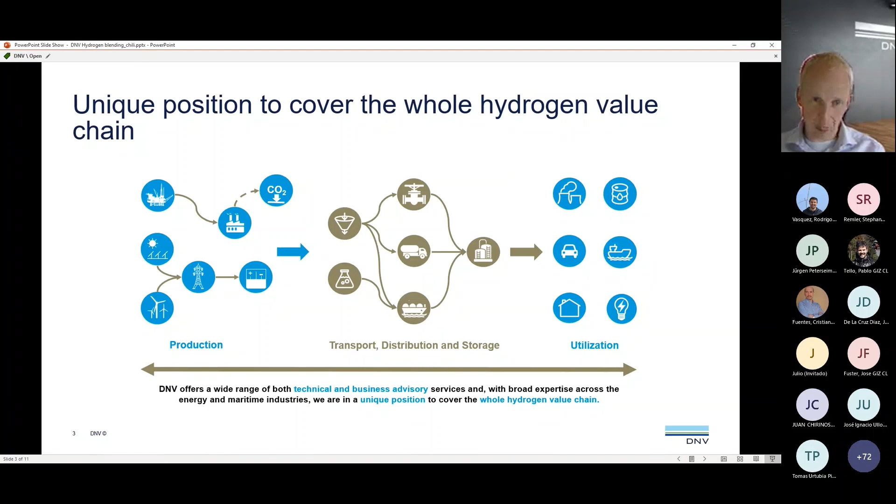So that's the overall view. And when zooming in a little bit more on hydrogen and the blending of hydrogen, I think one of the major projects that was executed in Europe some time ago already, where we had a role as DNV, was the NaturalHy project. In the NaturalHy project, a lot of R&D work has been done on the topics you need to cover if you want to reuse the existing natural gas infrastructure for transportation, but also the use of blends of hydrogen with natural gas.

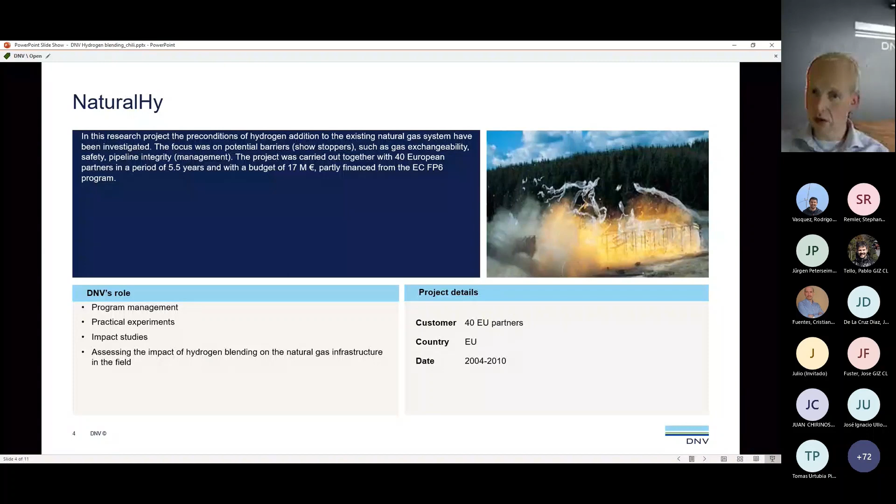It was a large project with over 40 European partners over a period of more than 5 years, funded by the European Commission. Besides the project management, we also did a lot of experiments, so it was really an R&D type of project. From that, we got a number of learnings, and it's good to mention some of them. For example, if you consider blending hydrogen into the natural gas networks, you have to deal with a number of aspects.

Looking at pipeline risk, the risk is always the chance that something goes wrong times the consequences. There we see that mainly on the consequence side, the effects of adding hydrogen are a little bit different from natural gas, and I will show you some examples of that in a minute. The last part is that in such an infrastructure system, all the gas going through the transmission system and the connected distribution system will end up in the end user appliances. There, blending hydrogen has the largest impact, I would say, and I will spend a few words on that in the next slide.

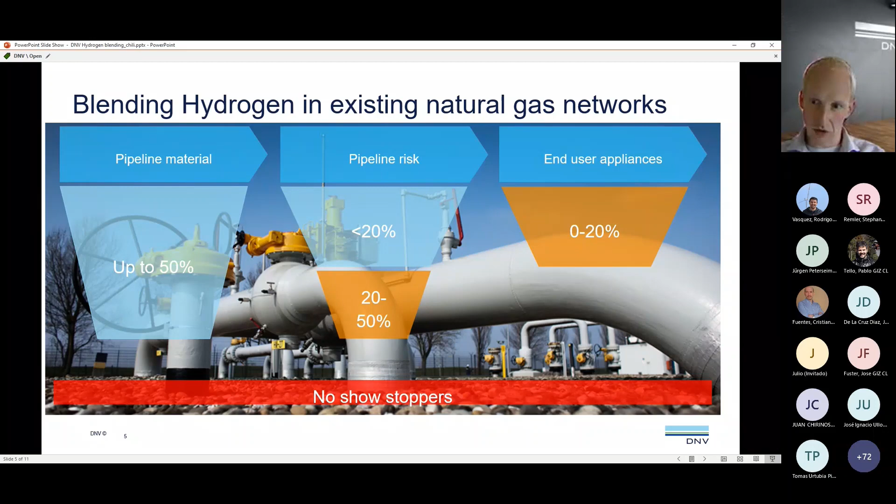Overall, you can see here what percentages are mentioned in the NaturalHy project for how much hydrogen you can add. One of the main lessons from the NaturalHy project, which we also see in ongoing projects considering hydrogen blending, is that there are no real showstoppers for introducing hydrogen into natural gas infrastructure systems. To focus on these three topics, I made a number of slides. One of them looks at the materials: what happens if hydrogen comes in contact with the steel of which the pipeline is made?

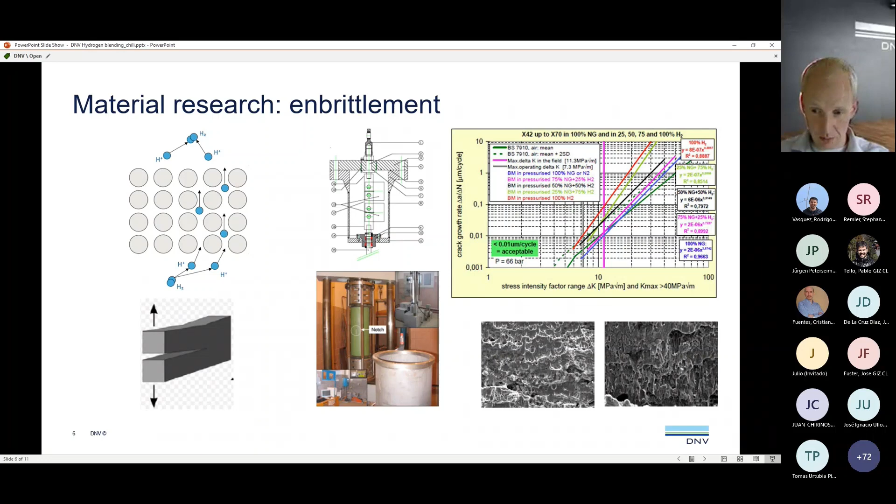So basically, the conclusion of this work was that in principle, you can use the steel pipelines that are used in the transmission system for blends of hydrogen up to even 100%. And that's also one of the main conclusions which, for example, now in the Netherlands is used by Gasunie, our TSO, to develop their hydrogen backbone, which is supposed to transport pure hydrogen through existing pipeline systems. So that's on the material side.

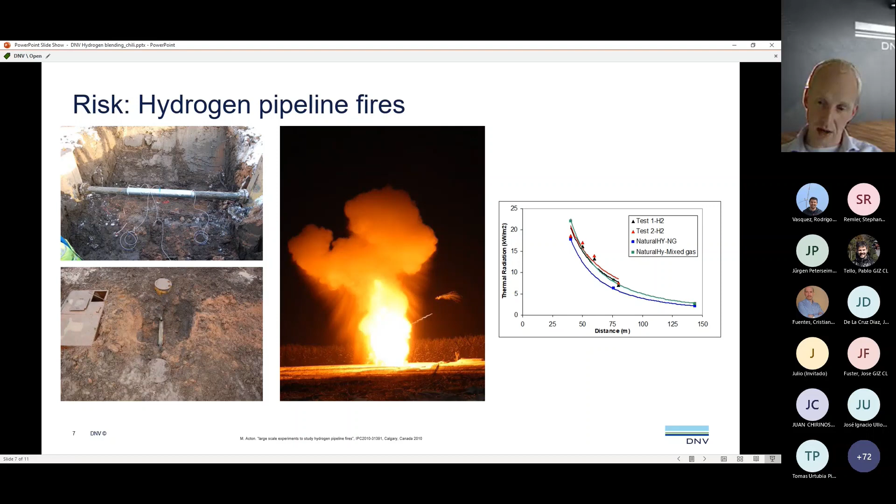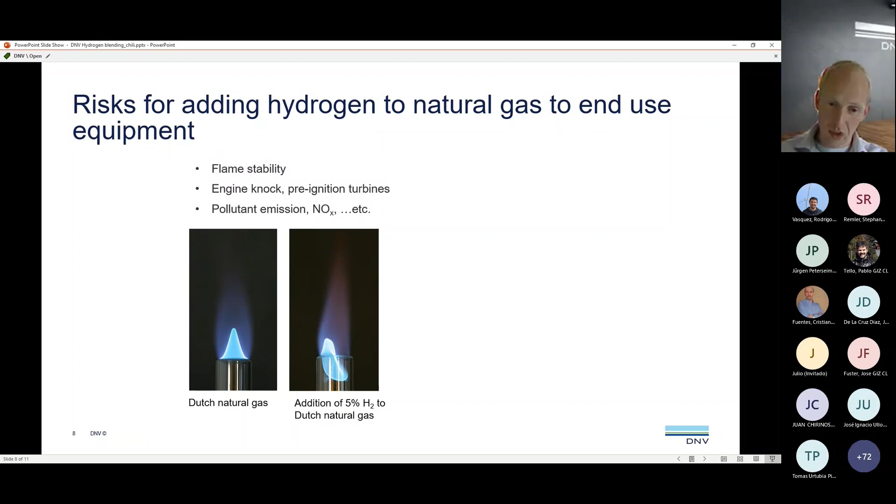So the second effect is that when the flame comes in contact with the burner deck, it could overheat, so higher temperatures, and it could destroy your burner. And the third effect is that the temperature of the flame is also higher, and because of that there are more NOx emissions. So there are three effects when adding hydrogen for combustion systems, and of course all kinds of combustion systems react a little bit differently, but basically these are the main effects.

And the same happens if you add hydrogen in an engine, where we have the combustion in a chamber, and then an effect called knocking of the engine could take place, which would destroy the piston of your engines. So as mentioned, the burning velocities are different when adding hydrogen to natural gas, and because of that, also the use of existing equipment for end use could be very sensitive to adding hydrogen to your network.

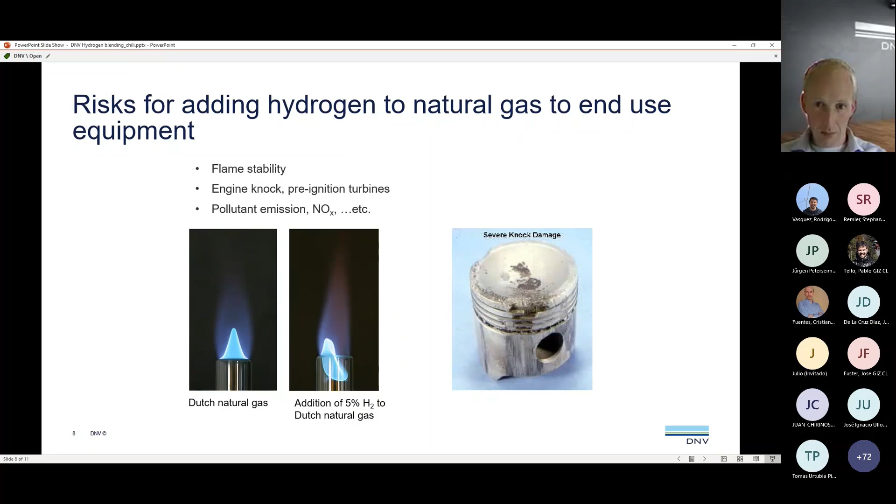And what we see is that indeed the temperatures of the flame are higher, and because of that also the NOx emissions are higher. But there are all kinds of mitigating strategies for lowering the temperature of the flame, which also would help to lower this NOx. The main conclusion here is that there are all kinds of innovative ways of solving the problems that we have with end user equipment, so that you can still use all kinds of blends of hydrogen. But the main thing, if you add hydrogen to an existing system, is to have a look at what the existing end user appliances are and how they are dealing with this blend of hydrogen.

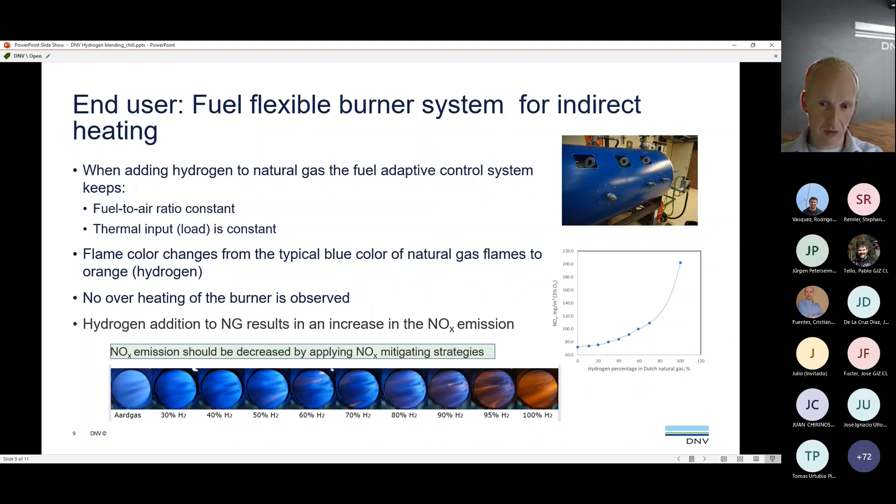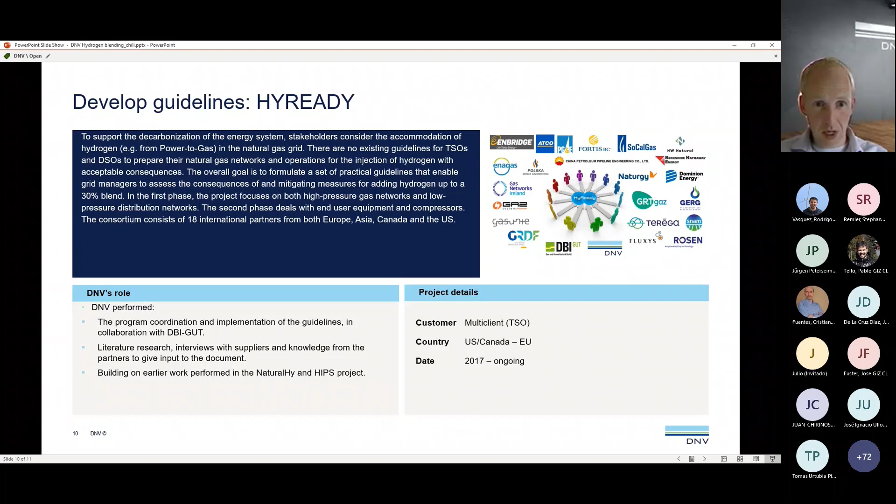And what we do there is make the guidelines not only for the transmission and distribution system, but also for the end user equipment. We have a look at the compressor systems, and nowadays we are working on the storage systems and the underground storage of hydrogen in salt caverns, for example. So this is an ongoing initiative which is still open for new partners. And with that, I would like to end my presentation, and I hope that I gave you a short overview of the work that we've been doing on hydrogen and blends.

Okay. I guess we will have the questions after this. Yeah. Thank you, Albert. As I said, the question and answer will be at the end, with the conversation panel. Yeah, we have some questions, but we'll take the questions at the end. Please, Jürgen, will you launch your presentation? The floor is yours. Just 1 second. Let me get the presentation up and running. Okay. Here we are. Share. There you go. It's here. Perfect. So let me know, can you see my slides? Oh, my slide. It's only one.

Yes. Thanks everybody. Thanks for organizing this event. And I think it's quite complementary to what my DNV colleague just said, with more examples and how we view the world, basically the market, after some technical specifications. Yes, Jürgen Petersheim, I'm with PwC in the Sustainability Services section of the company.

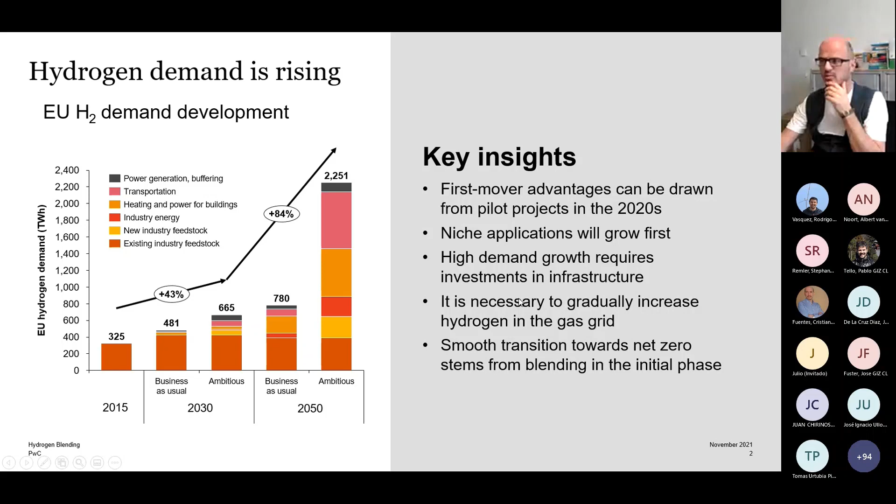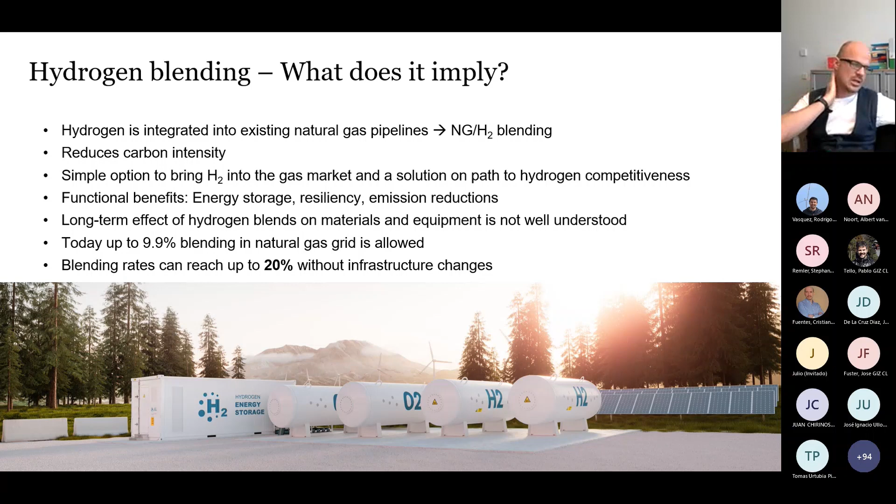Without infrastructure changes, you need to do a proper assessment of the pipeline network. So as mentioned before, look at hydrogen embrittlement, look at the materials used, look at compressors, valves, etc., used in the system. So then you can get this accreditation towards 20%. Higher blending rates are in discussion. So there are some tests going on, prototype tests basically, or pilot tests, with up to 30% hydrogen blending in the natural gas grid.

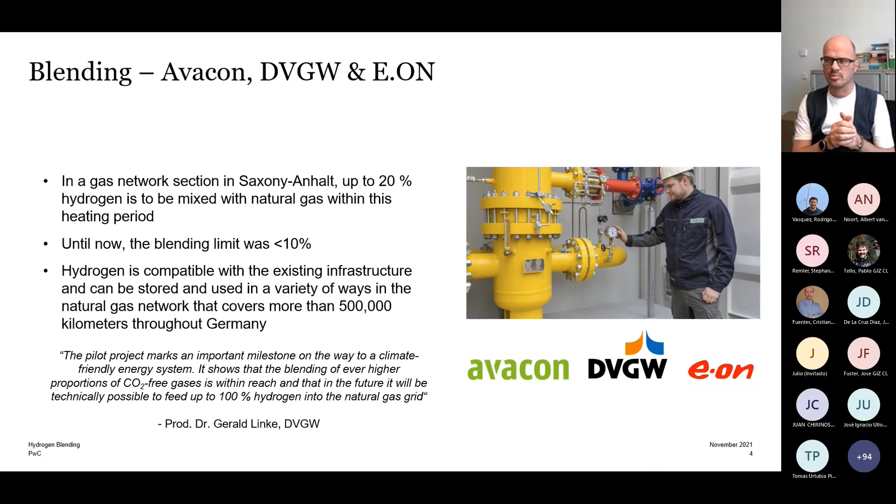It certainly is a project that's being closely monitored. It's a pilot project that shows how we can transition towards this net zero carbon economy. I'm pretty sure we will get more information about it soon, also enhancing the public knowledge on what is actually possible and what constraints, problems, challenges may or may not occur when actually putting it properly into systems. So after this heating period, we will know a bit more and get a better feeling of where the limitations are, in addition to all the pilot testing that has already been done. So I think it's a very interesting project.

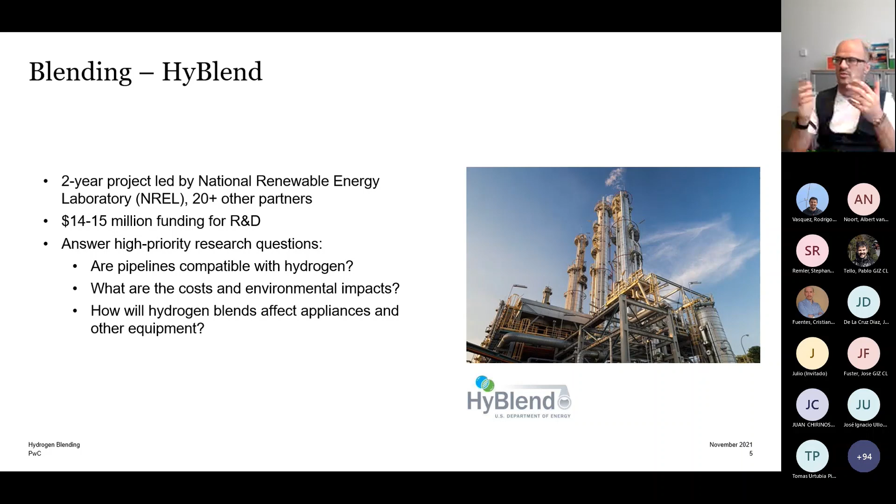Another one, a lot smaller and not in Europe, is in the US. It's HyBlend, a 2-year research project that's ongoing. We find such projects in many parts of the world, these types of research applications in many European countries and elsewhere. But I just wanted to mention it for the sake of completeness, really.

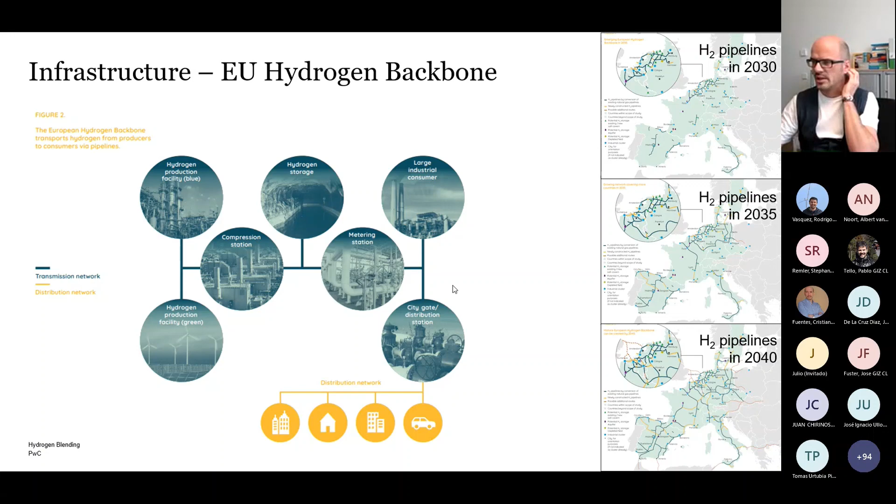So it's certainly a project where there was the idea on where to start first with the repurposing of these pipelines. So try to connect industrial clusters first. And there was the analysis of what is the cost per kilometer investment for repurposing versus new construction. And you see it's almost a factor of 4. So if you start repurposing pipeline infrastructure for the transport of hydrogen, it's significantly lower cost than the construction of new pipeline infrastructure.

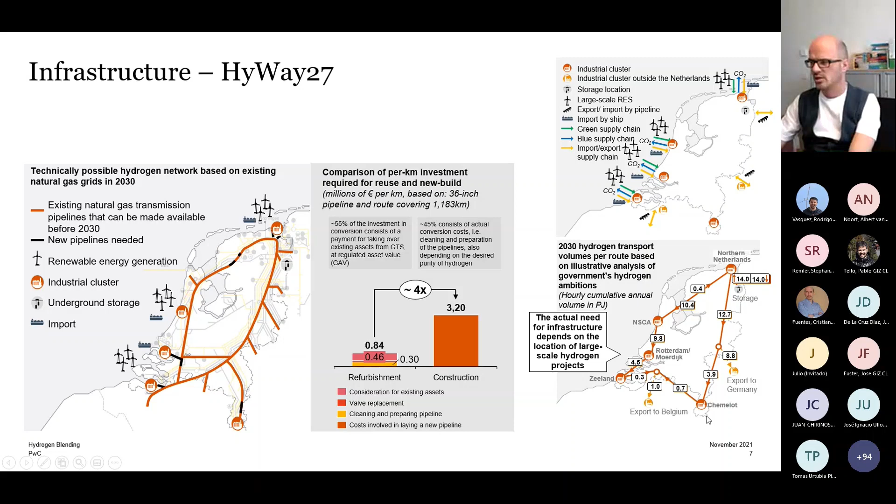And then from a European perspective, you see where the potential demand centers are first. So you see that from Rotterdam, you can supply some of the industrial clusters here with almost 10 petajoule, and then 5 petajoule going to other industrial clusters. While for some smaller applications, you would not have such a high demand. So you would say there is the potential to either repurpose smaller pipelines or then have this blending approach to provide the necessary energy towards these different clusters.

Additionally, if you talk about hydrogen and putting it into pipeline infrastructure and then the end user, you have to think about storage. So storage is something where we see some activities, not many. There are pilot projects going on. One very interesting one is actually this one here in Bad Lauchstädt. It's a salt cavern where they want to pilot the storage of hydrogen. They have the concept of putting a 30 megawatt electrolyzer onto the site, and then really see what are the effects of storing hydrogen in the system.

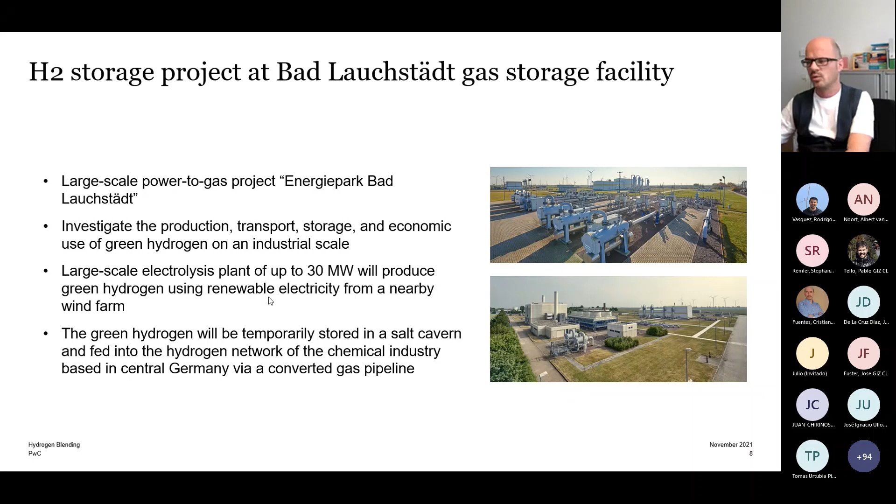Does it work? Is there any sort of gas creep towards the existing salt caverns? Does it have any effect on the salt cavern, any effect on the existing equipment? So storage is, I feel, least understood in the entire hydrogen value chain, and there's another one in Austria going on, I believe. It is an aspect we see more and more, and I'm pretty sure if you want to develop the hydrogen economy in your different territories, then you will have to look at the storage option as well. And I think these technical learnings from other parts of the world will certainly help and can be transferable.

Basically concluding quickly, because we want to have a good discussion. Hydrogen blending will certainly be relevant in the future, because it is a low complexity way of introducing hydrogen into networks. It's an option to pass on the cost premium to a broad set of consumers. Hence, you don't have to pass it on to a single consumer that gets a significant hit in energy costs. You can share it quite nicely.

What we see, obviously, is that investments in infrastructure are already on their way, but we really need to see this infrastructure being expanded for pure hydrogen pipelines, but also, if you want to transport larger shares of hydrogen, we need to have a look at the infrastructure and accredit it so that we can make larger parts of the gas grid available to plus 10, 20, 30% of hydrogen transport within these existing pipelines and all the associated equipment with it.

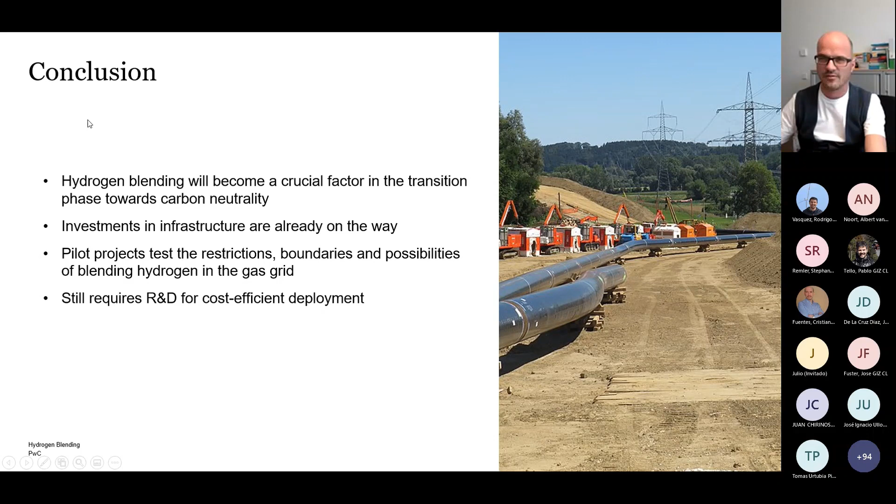And also, just a comment, as I said in my introduction, the possibility to inject hydrogen into the gas pipelines or the gas infrastructure depends on the most sensitive equipment, or on the capacity to change different elements in the grid. For example, valves or coolers or measures in order to know what is the quality of the gas passing into the gas grid.

And I see the different questions about the use of hydrogen, for example, in the distribution part, not only in the transmission part, etc. And it will be very interesting to hear from you about the considerations you have, that we have to inject hydrogen, or in the future 100% hydrogen.